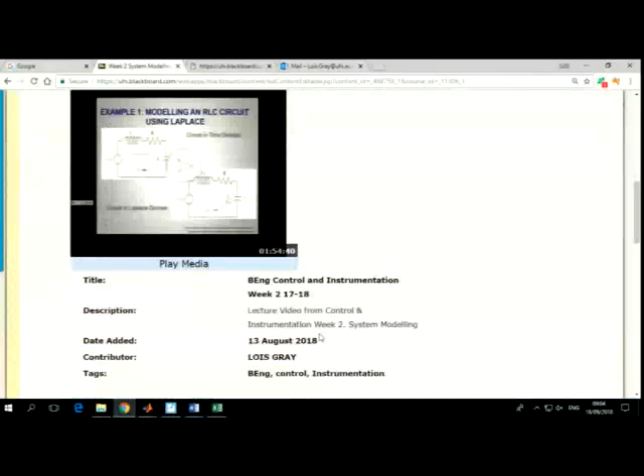So your notes are in this control folder still, so we're still looking at control for a few more weeks yet. We did week 1, so this is the week 2 stuff in here. I do have a PowerPoint which covers some of the more complex aspects, but I'm going to just do the easier models with you on the board first, I think. So as usual, there's PowerPoint, notes, lecture video - this is last year's one, but I'll put up this year's one as soon as it's ready. Some additional maths you just have a wee look at, and Laplace transforms as well.

Yeah, I'm not very sure what that is. I think someone else might have put that up, so same with those - I'm not sure how good those are. That other stuff you don't see.

Okay, so we'll just go with the model straight away if everybody's happy with this. So we're modelling mass spring dampers. I was going to say we're going to look at second order systems today. The slides go into first order systems as well, so we will cover them, but I wanted to concentrate on second order systems because your coursework is going to be a second order system. Right, can you remember what the difference between first order and second order systems was from last week?

No, too much to remember from one week to the next.

First order systems only have one energy storage element, second order systems have two. That's the difference. So a first order system might be something like an RC circuit or an RL circuit. A second order system would be a resistor, inductor, capacitor circuit, or a mass spring damper would be the mechanical equivalent.

So we will look at first order systems and their response, and that's also relevant to your coursework, but I wanted to do the second order ones first anyway. So.

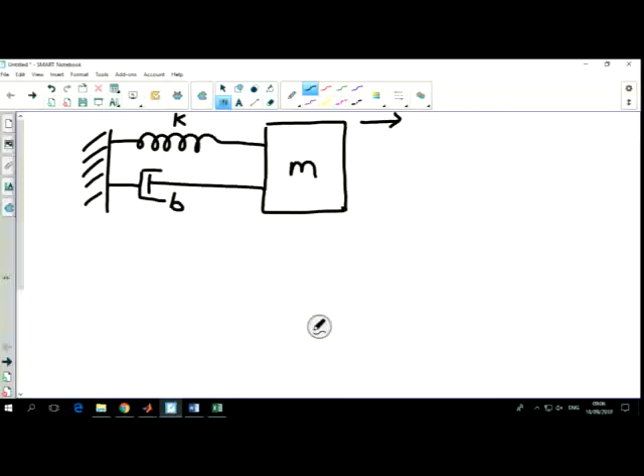We're going to try and move the mass in this direction by a distance x by pulling it with a force F. So this is your basic, most simple mass spring damper system really - there's not really anything more simple. It's a second order system because the mass stores energy and the spring stores energy, the damper dissipates energy.

Have you got any ideas what sort of applications that might apply to, like real systems?

I see the wagon in a train - both of the, I don't know how it's called - the wagons, the bumpers, like, not the wagons, the bumpers when they bump into each other. Yeah, exactly, yeah, exactly, yeah.

Spot on, that's true. There's a more common one I suppose, that most people who have cars - suspension in your car, yeah, like your car suspension, your shock absorbers, or something quite similar. We talked last week about the different kinds of inputs you could have, and if you think about a car, if it falls into a pothole, like if your wheel falls into a pothole, that's like a step change - a very sudden change from one height to another. Whereas going around a corner would be more like a ramp change because that's a constant force - well, pretty constant once you're actually in the corner, and that's applied as you go around.

So you can see why it's important to know how something's going to respond to different types of inputs.

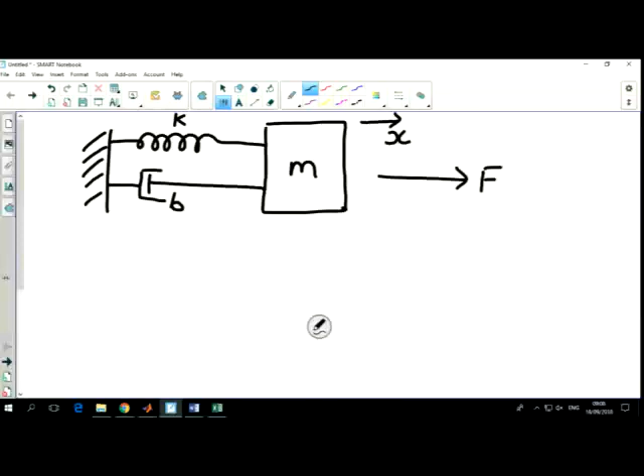The way we work these out - the people who did systems analysis last year will know a bit about this - is we obtain the differential equation for the system, generally in the time domain, by thinking about the first principles of each of the individual objects on the diagram. Later on we will do the Laplace transforms to get it into the Laplace domain, but now we'll start with just the differential equation, so we want to know all the sort of first principles that apply to these different objects.

We've got Hooke's law for the spring, which I think is that the force exerted by a spring is equal to the spring constant times the distance the spring moves.

Why have I got brackets T? Time - so these are functions of time, these vary with time, that's why I've got brackets T there. I don't always put the brackets T, sometimes I miss those off because they start to make the equations very long, but hopefully you will remember which things are varying with time and which things are constants. So K here is a constant - it's determined by the type of spring, what material it's made of, how strong it is, how many coils it has, things like that, so it's a constant related to that particular spring. X is a variable and F is a variable.

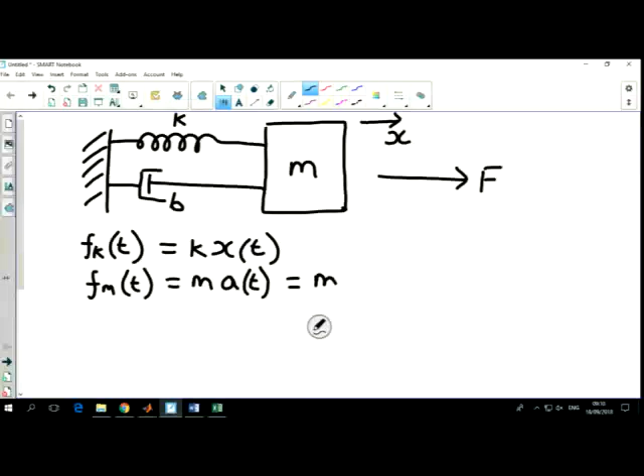Then we've got Newton's second law - I never remember which one's which, but we've got that the force exerted by the mass... anyone want to tell me what that is? Mass times acceleration? Yeah, good, somebody's awake. Mass times acceleration, which of course is a function of t, but mass times acceleration can be written as mass times rate of change of velocity.

That's meant to be a v, by the way, I'm not very good at drawing small v's. Which if we... oh, did that wrong.

So that's the slope of the velocity curve, that's the slope of the distance curve. Does that make sense? But anyway, you just have to believe me that that's equivalent to mass times acceleration. Acceleration is the rate of change of velocity, velocity is the rate of change of distance. So those are the equations that relate to that.

The reason I've done it that way is because when we're modelling this, what we might want to do is apply a force, either a step change or a ramp or an impulse or something different, and see how far the mass actually moves and how it moves. Whether it just moves and stops, whether it moves and bounces around a bit, like you might think, yeah, that's quite relevant to a car suspension or a bus suspension. We don't really want it to bounce about.

We want it just to move and stay solid. So a sports car, is it going to have less bounce than a bus, for instance? Yeah, so that's what we're trying to do here. And then we've got the final one, which is the damper, which is that the force exerted by a damper is equal to the damping coefficient times the velocity that the damper is moving at.

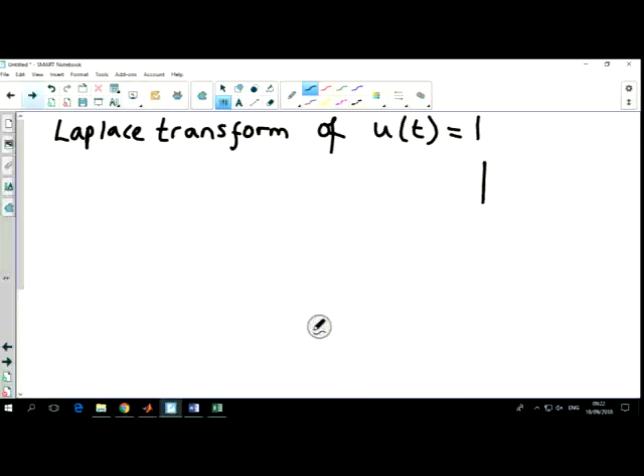In the real world, if we look at time versus amplitude, that particular function, u of t, is just going to look like that. This is the u bracket t function. I'll change to u because that's the standard way they represent steps. For some reason they always call it a function of u over time.

This one's quite easy, and I think most people would even be able to manage this. So we're going from 0 to infinity, and we're going for f of t times e to the minus st dt. In this case, it's going to be from 0 to infinity. Ft and ut are interchangeable, so that's 1 times e to the minus st dt.

Okay, so you guys write down the answer to that for me. You don't need to work it out over the limits, just get the basic integration for me to start with.

Working hard for a Tuesday morning, it's good. Some people are working hard, Robert's flying through it.

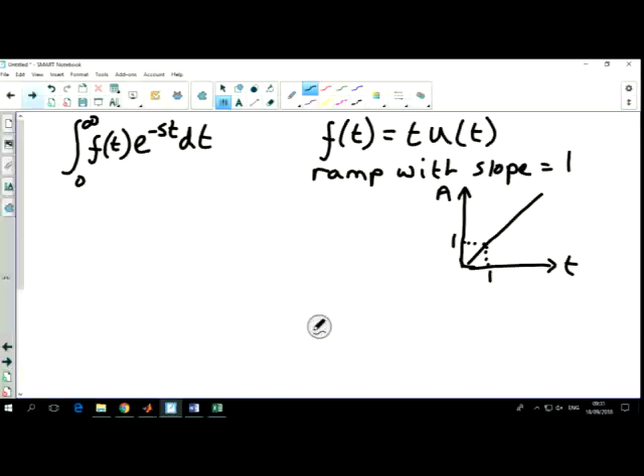Okay, so in that case, u(t) equals 1, and the ramp is just represented by t. So we can put that into our equation over here: t times e to the minus st, dt. Now this one's quite difficult, and I wouldn't expect you to have to do this in the exam, but I just wanted to show you how difficult it is and why the tables are quite useful.

Okay, so does anybody remember doing - what's it called - integration by parts? Is that what it's called? I'm not even sure, but I think it is. Did any of you do Maths 3 last year? Yeah, you would have done integration by parts in that, I think. For sure, it was quite hard, yeah.

The way it works is you can't really integrate that very easily unless you split it up. So you split it into 2 bits, where there's a standard equation for integration by parts: if you've got 2 functions like that, you can split it up into u, v. It's been a while since I've done this, I'm copying off my notes, but there's u, v, and du. The trickiest bit, I think, is picking which bit's which.

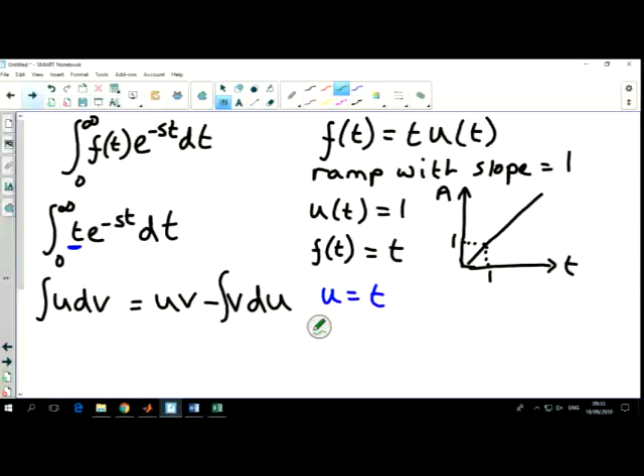So for this one, I've kind of done it in advance. In this case, we're going to say that u is t, so that's that bit - let me do it in a different colour. So that's that part, yeah? And the dv bit is e to the minus st.

So I do feel a bit sorry for the people taking this as their first unit. At least you guys have done some stuff last year, but it's really tricky as well for us - the dv bit, e to the minus st. That's why I don't like people doing this first, because it's quite tough.

Okay, then we want to just find the du. Obviously, we're going to need du, we're going to need v, and we're going to need u and v separately. So we have u - yeah, we said u equals t. We have dv - oh sorry, no, we don't have dv, we don't have v, we don't have du, and we don't have anything else. So we can get the other bits by just doing our derivatives.

So if you do the derivative du, what do you get for that equation there? T squared? Robert? 1? No, just dt - derivative of t. Yeah? You just saw it there. You do the derivative on one side, you have to do the derivative on the other side, just like any algebra. If you add something to one side, you have to add it to the other side; integrate one side, integrate the other side. So that's quite easy.

And to get this one, to find the v part, what we'll have to do is integrate dv, that gives us v, yeah? Integrals are the opposite of derivatives. So what we'd have to do is integrate e to the minus st, which you've already done quite a lot.

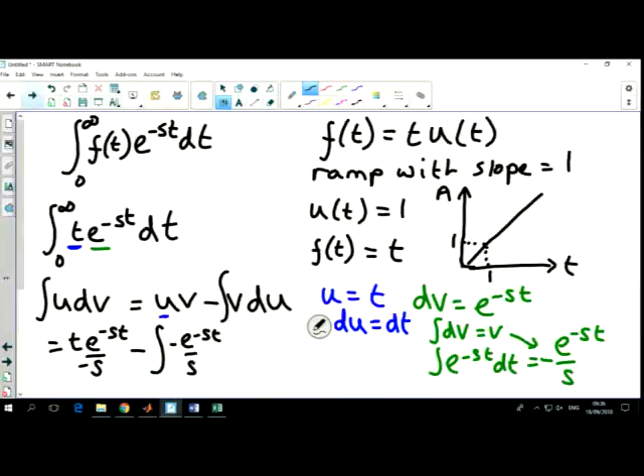What's V? Well, we just did that, didn't we? V is negative e to the minus st over s. So yeah, just move the negative sign up again. And du is dt, yeah?

So sadly we've got still a wee bit more integration to do, but we're getting there. Okay, this bit's finalised, we don't need to do anything with that bit. There's nothing else to do there, so we can rewrite that bit.

You can see where your maths comes in now, right? I think this is the unit that uses the most maths. I don't know if mechanical people would agree with that as well, but in my opinion it probably is.

Right, so now if we integrate that, we're going to get the top bit doesn't change, and the bottom bit we've got s, so we get s squared, only there's also a negative sign again. So it's actually negative times negative, or negative divided by negative, which gives you a positive.

And sorry, I forgot to put the limits on here. We should have limits, 0 to infinity. Because the whole thing was to do with our original equation up here, where we were integrating 0 to infinity, so we do have limits all the way through.

So we're almost there now. So if we rewrite that. So you can see actually integrating e to the minus something is actually quite easy. It's just the minus times t part always multiplies on the bottom, it always becomes a denominator. It's actually quite straightforward. Right.

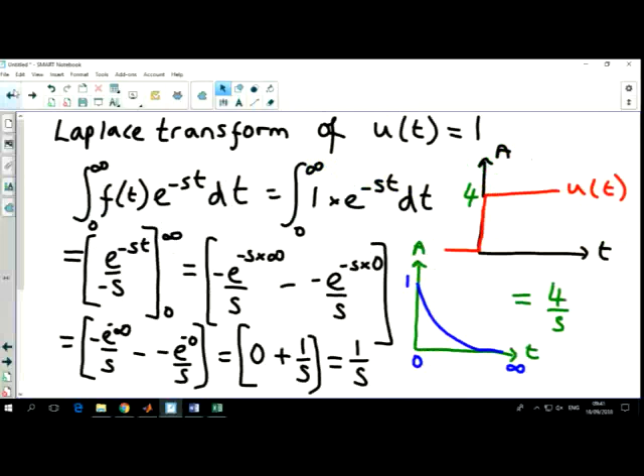If we go right back to our original equation, if you remember, the whole point of doing these Laplace transforms was to simplify that.

Now, there's a very straightforward Laplace table. I haven't got it to hand, but if you've got a function in the time domain and you want to convert that to a function in the S domain, S being the Laplace variable, you can get this table of transforms from most books. I'm pretty sure it's in our book here.

So you can have things like the function of time does actually just transform to a function of S. We write the functions in the S domain with capital letters, so we can differentiate them from the functions in the time domain. Okay, so that's the first thing.

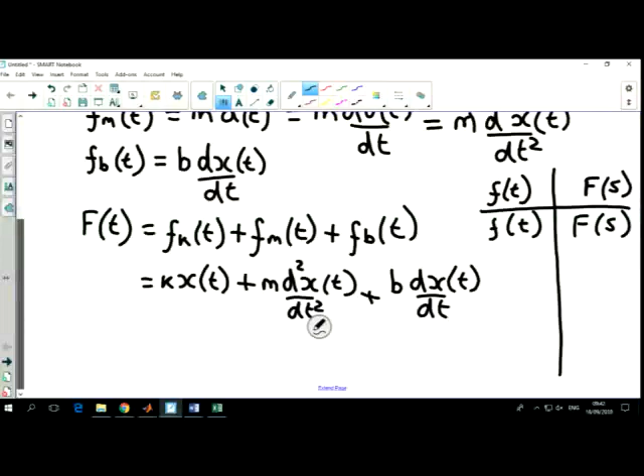Derivative, like dx(t) by dt, let's call it df(t) by dt. That transforms to S times f(s). Now, if you want to be really clever, you can go away and try and actually do that with the Laplace equation, but I wouldn't suggest you do unless you really like maths.

The second order function transforms to s squared times f of s. So hopefully you can see a pattern there. A third order function would be s cubed times the function in the S domain. Fourth order different - you're never going to do fourth order derivatives or differentials.

And then the only other one, I suppose, that's of some importance is the integral. That transforms to f of s over s. So pretty much that's the only one you're ever going to need for your system equations.

Transformation of system equations is this little columns here. Right, so I'm going to set you a little challenge now.

Going by this table, instead of a function of t, you've got f of t, you've got x of t. But other than that, it's the same. Try and transform this for me into the S domain. This is a constant, it won't change. That's a constant, it doesn't change. That's a constant, it doesn't change. So you just need to concentrate on the x brackets t parts. Okay? I'll see if anybody can do this.

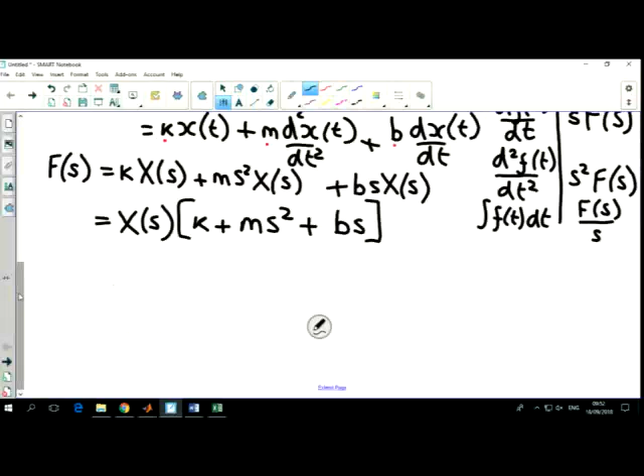That would give us, let's write this out so we've got more space. There's a few different ways of doing the next step, so it's up to you how you do it, but one way of doing it is to divide both sides by that big term there.

And in fact, I guess if you knew what your force was, you weren't going to do any modelling, you just wanted to see how x changed with a specific force, you could probably just use that equation as it stands, like that. But we actually want to have x over f. So if we divide both sides by f now, we get f of s divided by f of s, which gives us 1.

Oh, that should be an s. Sorry, that was a mistake. Es equals...

And that's the thing you can put into Simulink. I'll show you that to give you a break from the maths for a few minutes before we go into the electrical system.

So this is brilliant. We now have a model of that mass spring damper, and we can apply any sort of force to it and see what happens in the virtual simulation world. We can change our mass, spring, and damping coefficients and see how that affects how the mass moves. So it's really good.

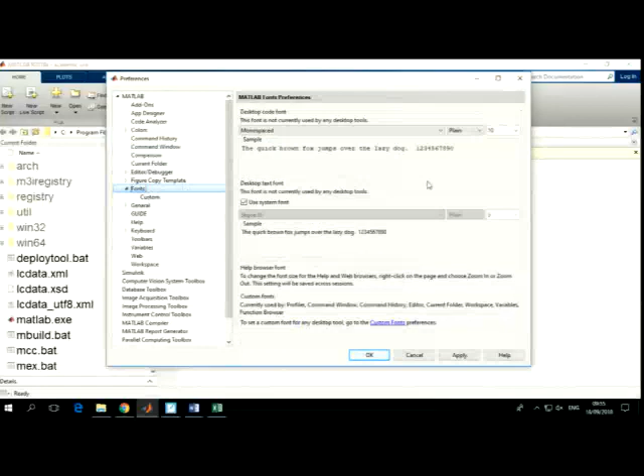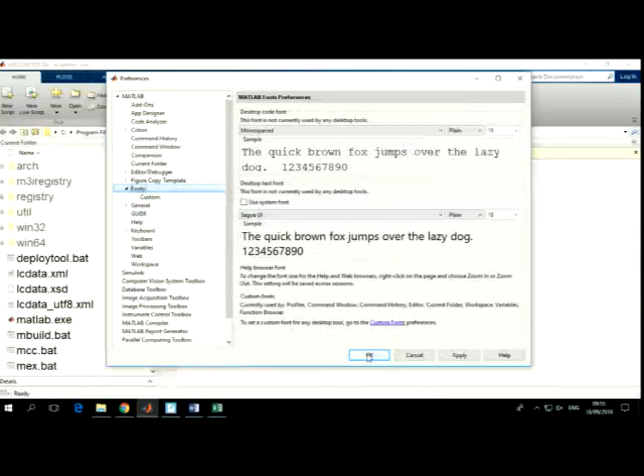Didn't get any bigger, did it? We know what's the next step. Sorry, right, okay, I don't know why that's so small.

But anyway, you can search for them in the search term here. You can search for transfer function. I know it's in this continuous block here. It's this one here, 1 over s plus 1.

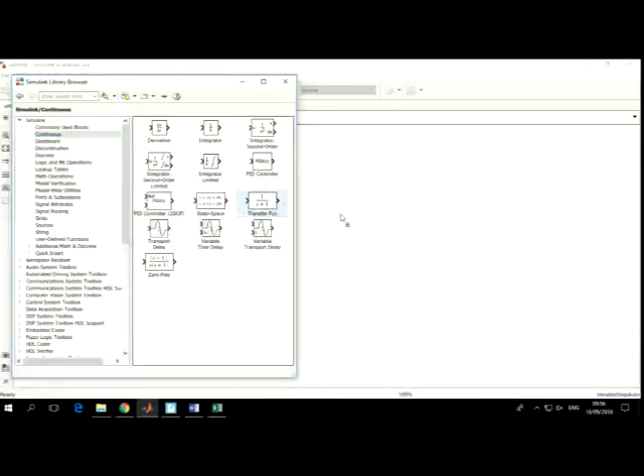I don't know how clear that is, it's probably not very clear to you, but we'll see it when I move it. So you just click and drag it, left click and drag it to take it onto your screen here. I think most people have used Simulink recently.

Then, if you're ever presenting these to me, I need to be able to see the equations inside the boxes. So make sure your boxes are big enough. If they just say k, that doesn't mean anything to me. I have to actually be able to see the equations.

So we want to edit this equation. So we had, on the top line we had 1, so that's fine. On the bottom line, I don't know if anyone can remember what we had. We had...

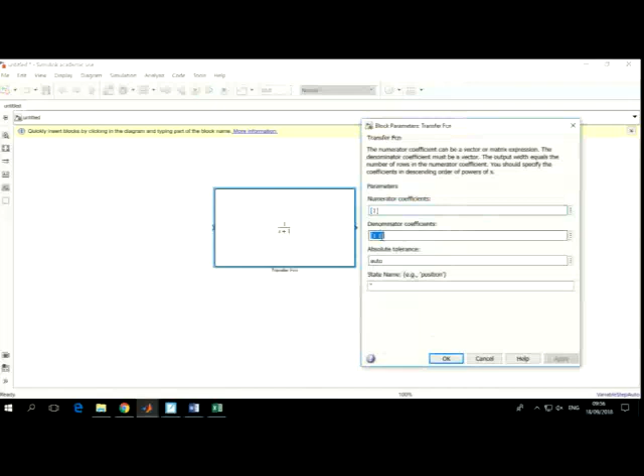Switching back to the notepad, I can't actually remember what it was. K, ms squared, bs. Oh yeah, now, when you're modelling these in MATLAB, you've got to rearrange them so that the s squared term is on the furthest side, or the highest power of s is on the left, yeah? I don't know if you remember that from last year, but...

So I would need to rewrite that as ms squared plus bs plus k. Later, probably next week, that's a very bad k, but hopefully you know what that was. Next week I'm going to show you how to relate that to a standard second order system.

So we've got m, b and k to put into our brackets. Can't make this any bigger, not really. We've got m there, b and k.

Sorry it's so small. The way it works is MATLAB will put the s terms in, so it knows it's doing a model in the Laplace domain, and it also puts plus signs in as well. So you only type in the multipliers of the s terms, yeah? So the multipliers in this case are m, b, and k, with spaces between them.

Have you done this before? No? Okay, so this is new to some people. I think some folk have definitely done it before. But... okay, then hopefully... I can make that font bigger.

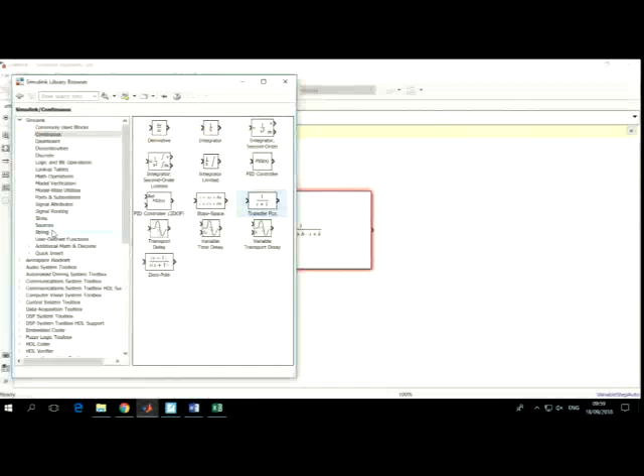We can simulate that system. There's a couple of different ways of simulating it. You can add in, let's get the library - we'll do something really simple because I don't want to spend too much time on this. You can add in a source, so let's say a step here. Just connect it up by left clicking, and then we can have a sink. Where's my library? Just put a scope on. There's better ways of simulating it, but we'll just go with this just now.

Okay, and I could just click run. Would that work? Would that simulate? No. Why not? Because you need to go to the analysis tool - no, it's because there's no values. I haven't put any values in for the mass, the spring constant, or the damping coefficient.

So let's type some values in. Normally you would do that on the command window here. I think last week I told you you should always make scripts, but if you're just putting values in, it's fine to do them just in the command window. You don't need a script just to add a value.

So I don't know, let's go for 2 kilos. I don't know if these are even realistic numbers, but - was the last one B, wasn't it? Actually, probably not very realistic numbers, but they'll do just now.

So now we can simulate that. And you're quite right, somebody said, oh, you need to use the analysis tool. The analysis tool is a better way of simulating it, and I'll show you that probably another day. That uses different input and output, but it'll give you better results, especially if you're looking for things like frequency analysis, like bode plots. But for the moment, this will do.

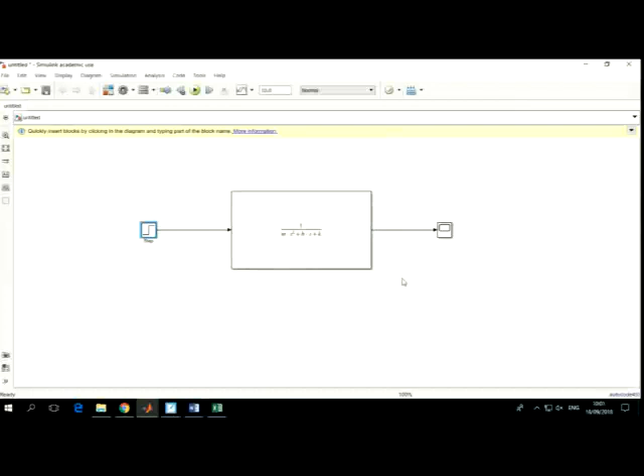So what we put in here was a step. It had a delay of 1, so there was a lag time of 1 before the step was applied. It started at 0 and went up to an amplitude of 1, so it's a unity step. We can check on the scope what's actually happened. Hopefully - is that happening?

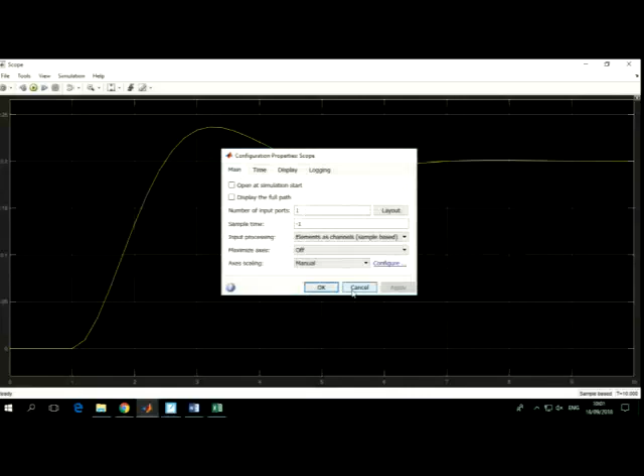Yeah, okay, and here we have a reasonably typical - let's change the background. I can't remember how you change the background on these. You're on the right bit, I think. It's alright like that, can you see that? No, I think you're on the right bit. Yeah, I thought it was, but I couldn't figure out - style, maybe. And then I can change that to a different colour, and I should be able to change the figure colour to white. No, that didn't work, did it? Axis colours white - that's better. There you go, you can see that better, I think, yeah?

So this is a fairly typical response for a second-order system. You can see that it reaches a final value. Remember last week I said you had a transient section of the response and a steady-state section of the response. So this part here is the steady-state section, it's reaching a final value. I can tell you it's only reaching 0.2, and we've got an amplitude of 1 in, so it's got quite a lot of loss, it's got a big steady-state error. We would expect it to reach 1.

It's got a bit of overshoot, so the mass will actually move and then settle and then move again. It'll move backwards and forwards before it finally settles. So it'll move in the direction it's being pulled, and then it'll move back, and then it'll settle. It'll stop moving, yeah? Remember, we're not applying the force all the time - we're just applying a force and then taking it away, or a sudden change in force and then keeping it constant, rather. That's what I meant there. Okay, so you know you can measure certain things off this.

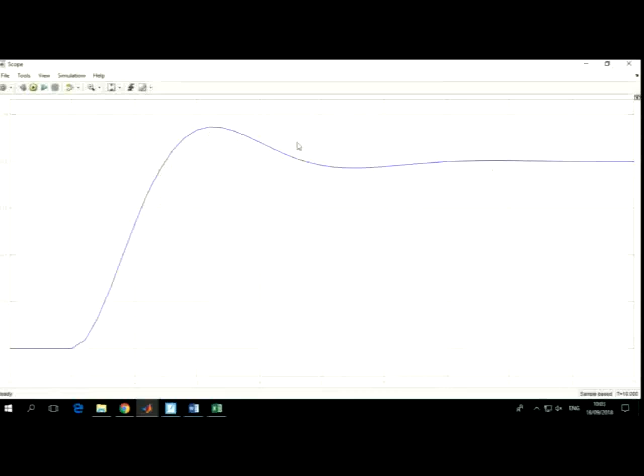You can measure your rise time, overshoot, and settling time, and that would really define how that mass was going to perform in the system. So if it was a shock absorber, that's not a bad curve - it's not going to give you a lot of bounce. I'd say that's more like a sports car than a bus. The bus is probably going to wobble and then settle down. Does that make sense?

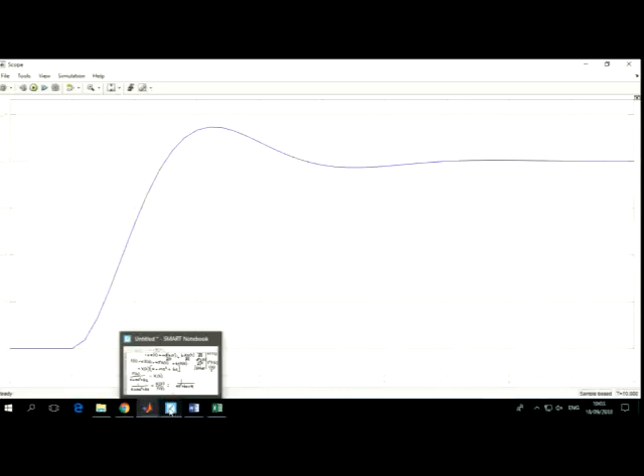Okay, happy with that? So that's how you model it. Now I wanted to show you the equivalent electrical one. We'll do it a bit quicker and not with quite as much maths. So, let's get a new page.

This is the last bit - well, it's not really the last bit because I want to go through the slides as well, but this is the last bit of complicated maths, I would say. Okay, so...

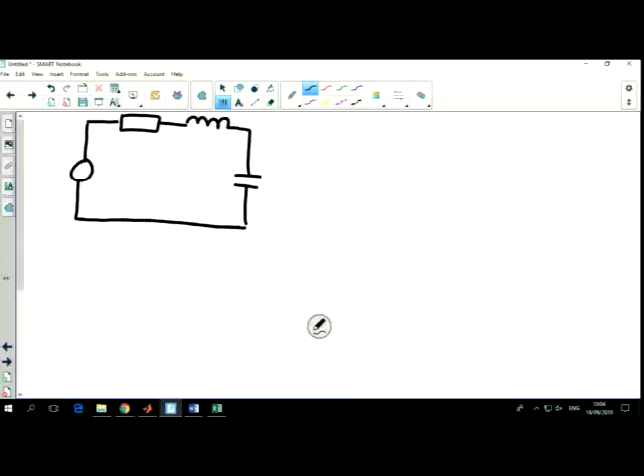Again, we'll do a second-order system. This time we're going to have an inductor and a capacitor in the system. We'll have a voltage here - call it the source voltage. We'll have a volts drop across the resistor, a volts drop across the inductor, and a volts drop across the capacitor.

Okay, and then from Kirchhoff's laws, we know that the sum of potential differences equals the sum of EMFs, yeah? That's from Kirchhoff's voltage law.

And then from our first principles, we can relate the voltages to the current flowing through the circuit, and then we could find what happens with the current if we apply a change in voltage. Okay, so it's a series circuit, so it's the same current that flows right around the whole circuit. Let's call it I - current, because I is normally what we use for current.

Okay, so this side of the equation doesn't change. We can use Ohm's law for VR, for that one. Let's give these some values - so that's R, that's L, and that's C. They could be numbers, but we want to do a model without numbers so that we can change values. So we're going to use variables or constants as letters instead of numbers.

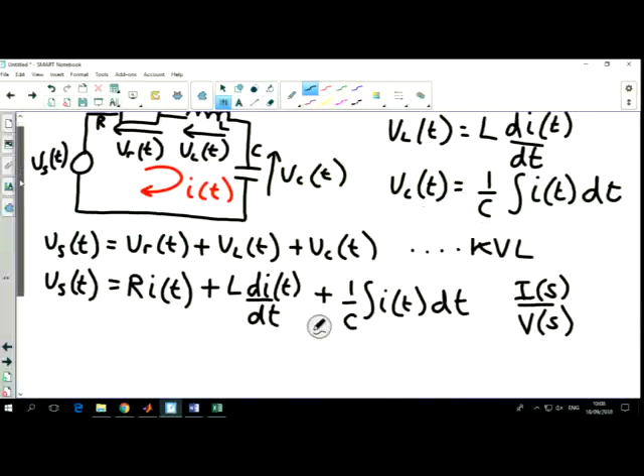Okay? Right, so we want to do our Laplace transforms. I'll rewrite the table here for you. So we had f(t) becomes F(s), df(t) by dt becomes s times F(s). The only other one you need probably is the integral of f(t) dt becomes F(s) over s.

Right, so I want you to do the transform of that equation for me. Okay? Check it. Talk to me.

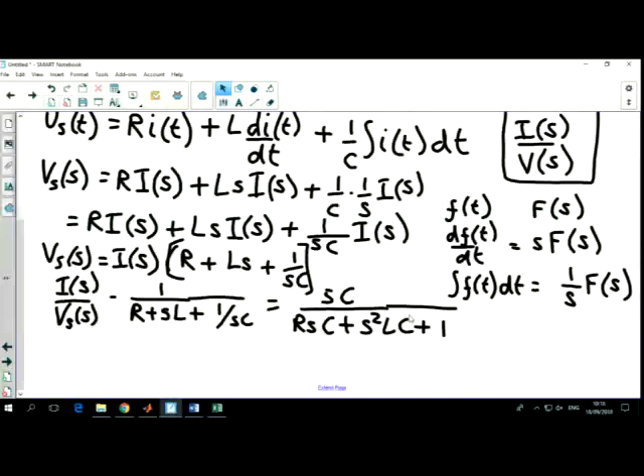Okay. I'm going to put the PowerPoint on now, I think. I'll skip through quite a lot of the slides because we've done quite a lot with the board. Any questions about what we've done so far? I think Harry's still writing stuff, so... I'm okay, that's fine now. You sure? Yeah, done now.

Okay. So, you're not going to really like the maths in this, but you're not going to have to do anything as complicated as this in the exam, so I won't worry too much about it. But I just want to show you how more difficult it gets quite quickly. You don't need to add a lot of elements for it to get pretty tough.

Okay, so we'll just click through this. Done that, that's our table of Laplace transforms - you'll find that in the book. So this is quite easy. This is the time domain, this is the S domain, and you just transfer them.

Don't worry about any of these F0 minus things. They're not really relevant for you just now. I'm only really interested in this bit here.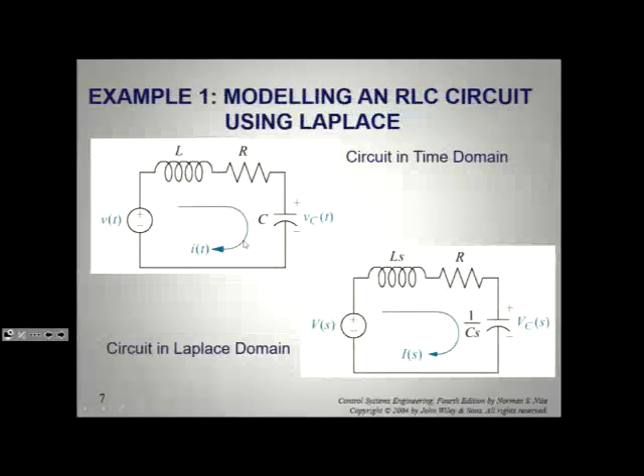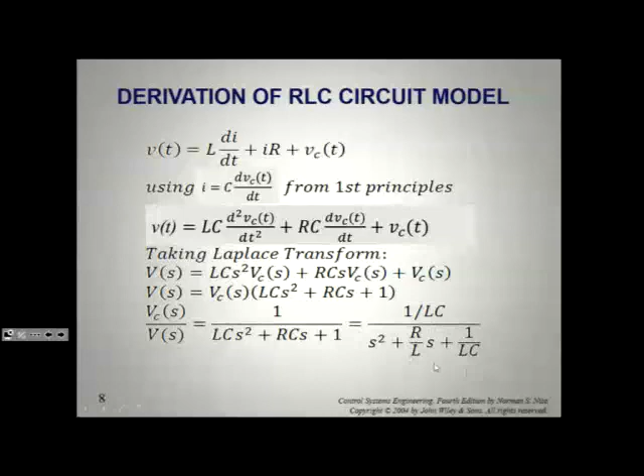That's our circuit in Laplace domain. We've done that, skip through that. You should see this is the same equation that we actually came up with, I think. It's been rearranged a wee bit more, but it's the same idea.

Okay, so now this is a more complicated one. This is two closed circuits together. I don't know what that might represent, maybe a couple of lighting circuits or something like that. So we use our mesh analysis to get equations for both the loops.

In fact, if I switch - yeah, so mesh analysis gives us these equations. We did that last week. Remember doing that, where I showed you how to do Kirchhoff's voltage law for each loop and then relate the equations together. We did do it last week. If you can't remember, have a look at the slides or the video.

So that's our... okay, they've done this a slightly different way. I would normally do that in the time domain first and then transform it, but what they've actually done is they've done the transformation of the elements first. So instead of getting a time domain expression, they've transformed the elements to their equivalent in the Laplace domain.

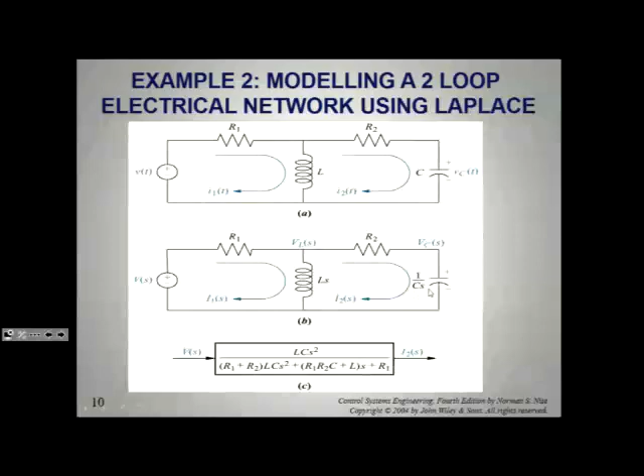So you can see here the inductor has become S times L, and the capacitor has become 1 over S times C. That was what we transformed those to. We did that a minute ago again - it might make it a wee bit easier.

So we end up with our two equations in the Laplace domain, and then it's really a matter of rearranging them so we've got the unknowns all on one side and the knowns all on the other side, which is what's happened here. So these look really complicated, but they're actually not that bad.

And then we can use our matrix algebra to solve this. Again, I showed you that last week. What we'd probably use here is something like Cramer's rule.

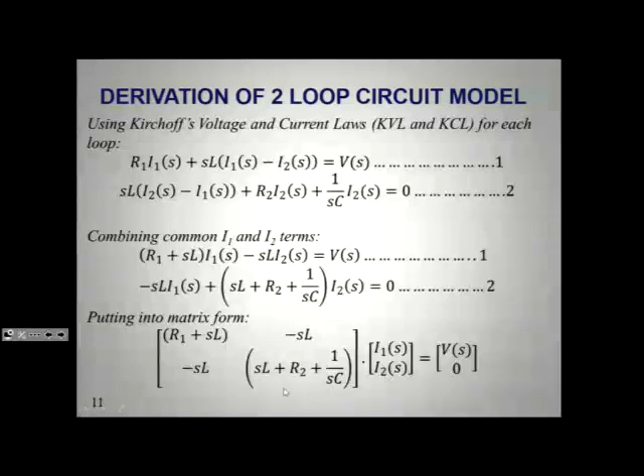So you find the determinant of this matrix, and then to get I1 you would replace this first column with these two, and find the determinant of that. To get I2, replace this column with these two, and find the determinant of that, and eventually get a really complicated equation where, using Cramer's rule, the determinant for I1 divided by the determinant of that, and the determinant for I2 divided by that, gives your system. I'll show you that, but it's pretty complicated.

You can have a look at this in your own time. Go through this and just see if you can follow it at all. So DET stands for determinant, yeah? And it ends up being pretty complicated, but hopefully you can see what that looks like.

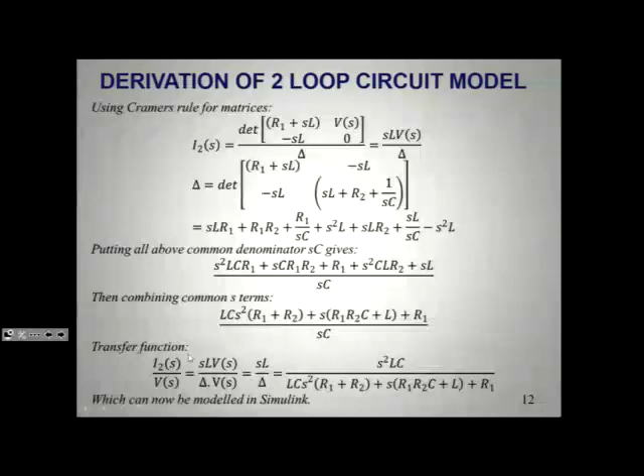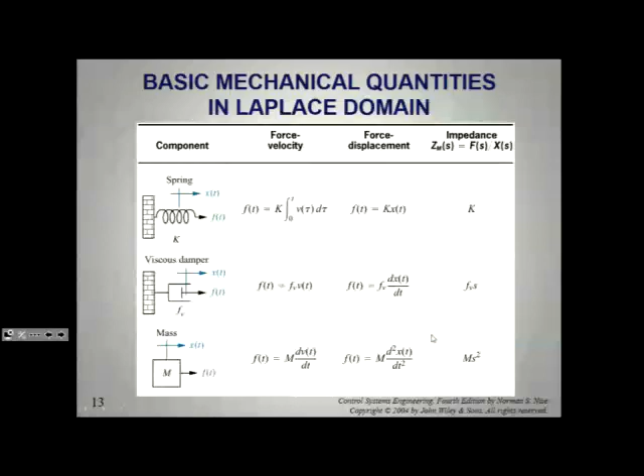And then a wee bit of algebra just to rearrange it to get I2 over V. I don't want to go through that in too much detail. That's our mass spring damper system, equivalent table to the electrical system. We've kind of covered that already - that's the one we did.

So we did that already. That's just showing you the free body diagrams. We'll skip through that. That's the equation that we ended up getting.

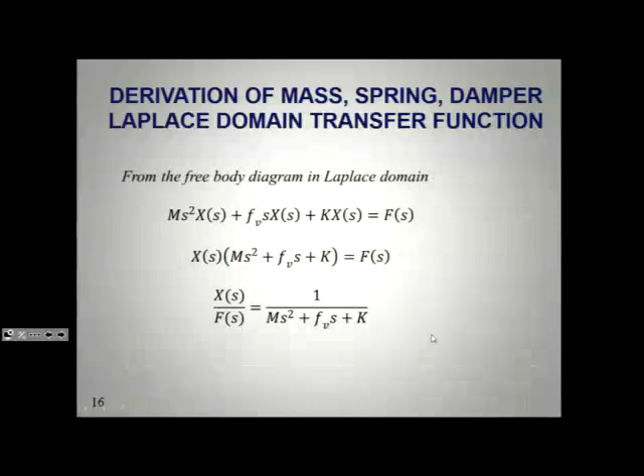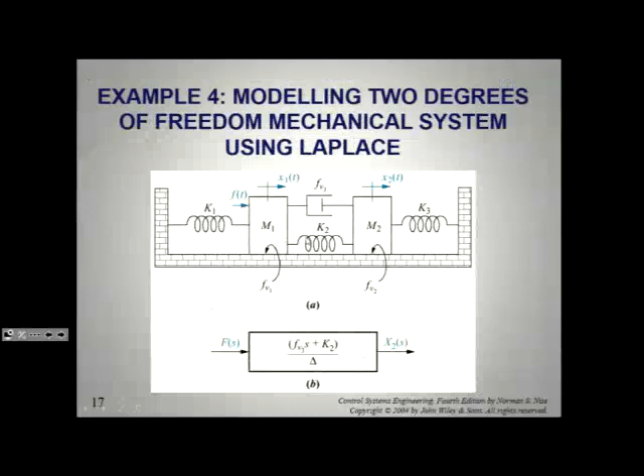Yeah, so again, I think what they've done here is they've converted it straight to the Laplace domain without using the time domain at all. So that's where all these k1 times x, and you see these little s's slipping in here. That's because it's already in the Laplace domain before they started analysing.

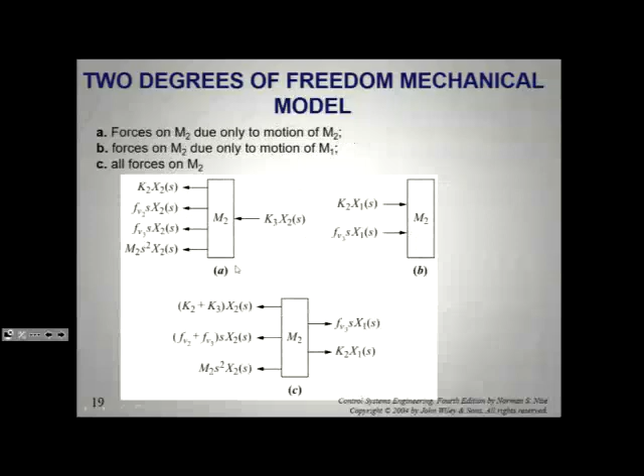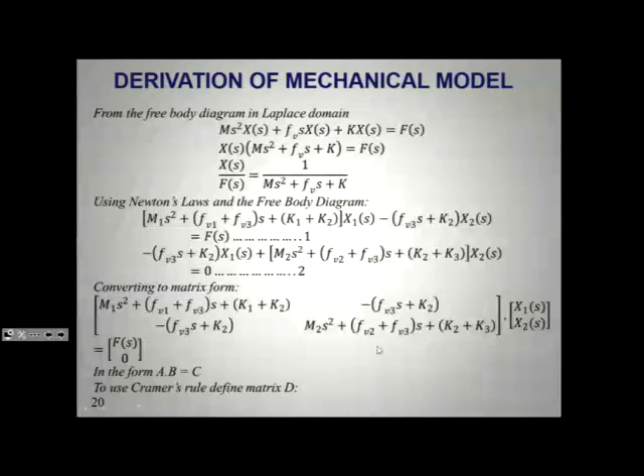Okay, then relating your forces, two simultaneous equations, and the same idea, convert to matrix form and use your Cramer's rule to solve. Yeah. Now it looks really awful, but I guess if you put numbers in, it wouldn't look so bad. So you get something like that. I think we'll just skip through that. People who are really interested in mechanical systems can have a closer look. I don't want to do too much of that.

I just wanted to show you can use this same modelling, mathematical modelling, for other types of systems. So you can also do it for rotational systems. So here you've got your basic equations for rotational systems, and obviously you can analyse a rotational system with that. And you can also do it with electromechanical if you combine mechanical and electrical together. So there's one for a motor later on as well.

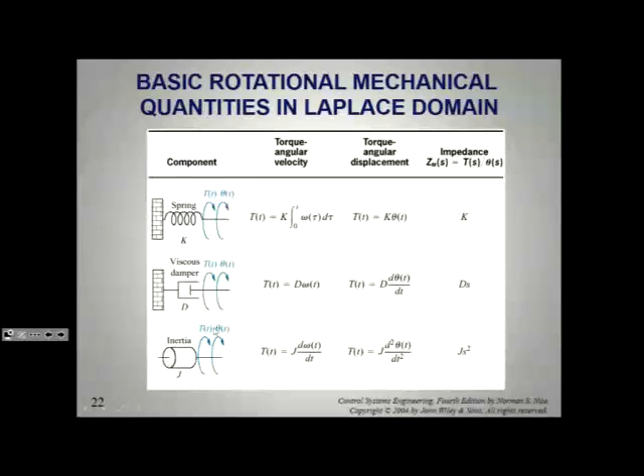So again, same sort of idea. Spring's just a constant, spring constant. That's your damping coefficient. And this time, if you're talking about rotation, you're talking about inertia, J. And that's torque and angle. So different variables, but the same idea.

Again, this tends to get quite difficult because I see the examples in the book don't just have a simple mass spring rotational element in it. They tend to use gears and other rotational elements. So I think it's pretty difficult in the book, this stuff. But,

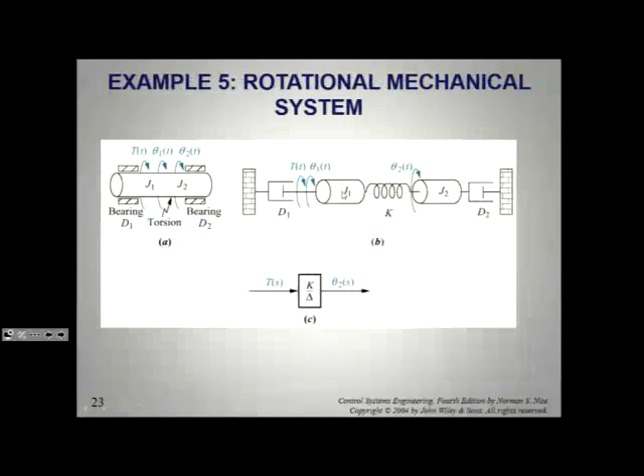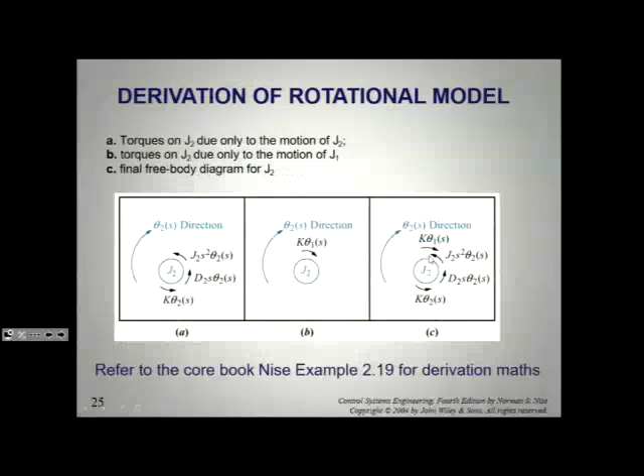so that's analysing this system here. And you've got to do it the same sort of way you did with the two masses. You've got to look at all the forces on J1 and then all the forces on J2, combine them, get your simultaneous equations and solve that. Again, I'm just going to skip through that, I think, because it's a bit too difficult for me. You guys probably aren't going to manage it either. People who are really into mechanical stuff might like it though.

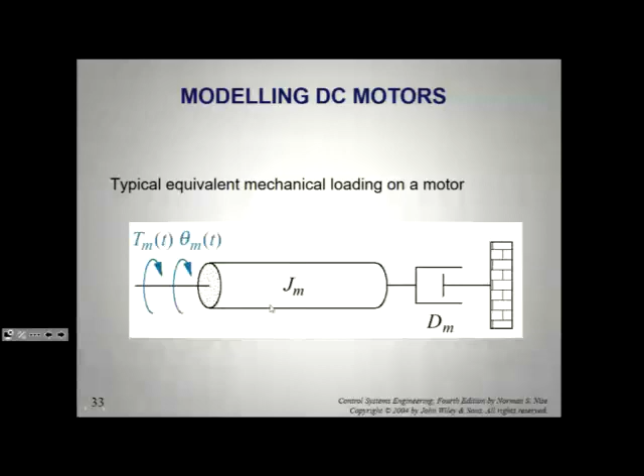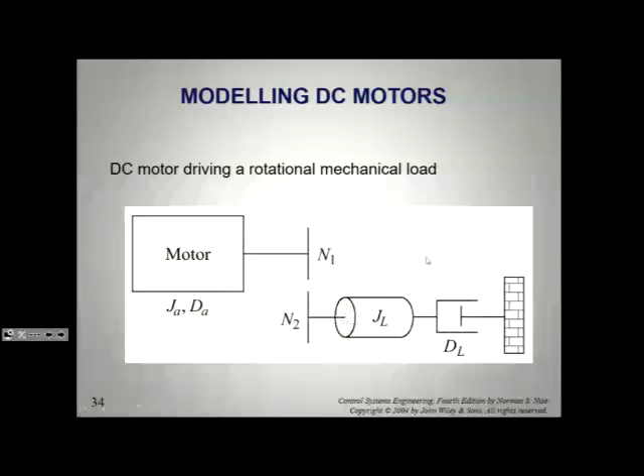It's damper here, and we didn't really do much more than that. That was all I did there, just to show you. So you don't need to worry too much about this unless you're really interested in it, but we're not really going to do that in any detail today.

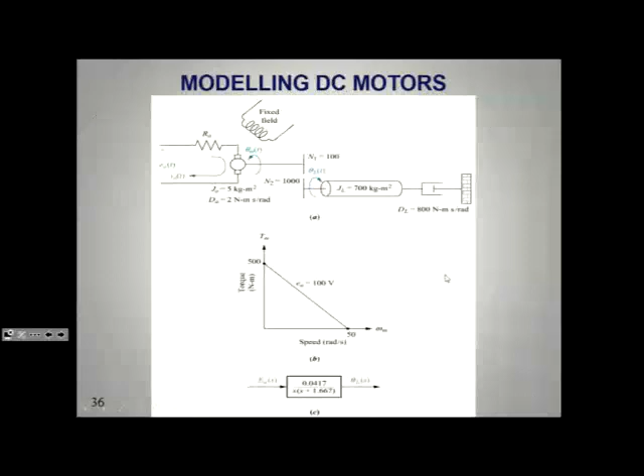The other thing I wanted to say, sometimes you have nonlinear systems. So what sort of things could cause a nonlinear system? Disturbances, possibly, yeah - because they're out with your controls, so we don't really know what effect they're going to have. It could be a linear effect, might be a nonlinear effect.

In the mechanical world, what would cause a nonlinearity in the mechanical world? Okay, so in kind of systems world, I suppose you might get a lag time - for instance, in a flow system where there's a little bit of lag before the flow builds up to what it's meant to be, or a short amount of time where nothing happens.

You could get saturation in the electrical world. I don't know if anybody's ever done anything with amplifiers, but you reach a point where the amplifier can amplify no more, so it doesn't follow a linear function anymore, it just stops.

So that's a nonlinearity. I think with the mechanical world, they normally talk about backlash in gears, so that's where the gears don't mesh straight away - there's a little bit of a delay before one gear will turn and the other one won't, before they mesh and start to rotate together. So again, that's a nonlinearity - it's quite a lot of things.

All the systems we're looking at, we're assuming are linear, but it's not always true. And what you have to do, if you do get a nonlinearity, is restrict the time period or the input that you're looking at to a very small fraction of the total input, and just analyse for that little bit.

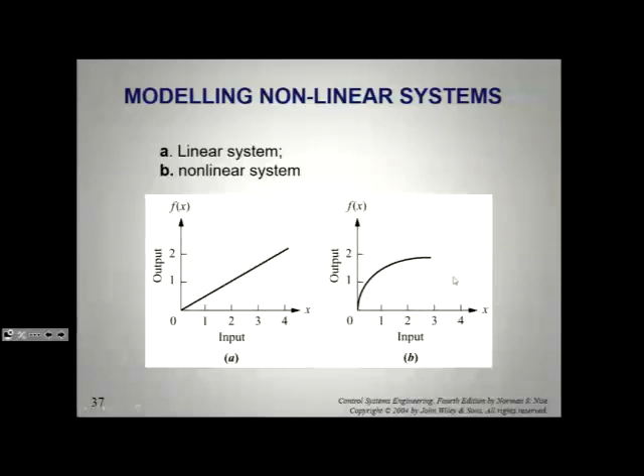There's some ideas of nonlinearities there, and that's what Simulink does. Right, that's the end of the slides - I'm not going to go into any more detail with them because I want to show you the coursework. So, has anybody any questions? It's been quite a long lecture, so I'm probably falling asleep.

Let's have a look at coursework, and you can maybe have a look at getting started on this today. So, it's under assignments. I think I'd already opened it actually down here.

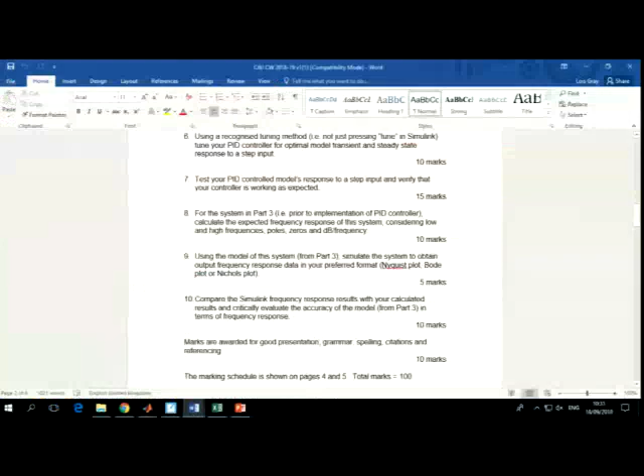So the idea is we're going to be looking at a real system - all right, it's not really a real system, it's the Bytronic rig, but it's near enough a real system. We're going to be measuring some data from it - I've already done this. You can have a look at the video and you'll get the data. If the data's on Blackboard, I'll show you where that is. And then using that data, or using the system, it's up to you - you're going to draw a block diagram and then model each element, or model it as an entire system. You've got a choice.

So, if we look at the data, I've got the data open here.

The first problem with the data is that we applied a step change to the level control. When you look at the video, you'll see some of you used the rig before. There's a bottom tank, a pump, a couple of valves and flow measurement sensors, and then there's a top tank.

With the rig, you can control the flow and the level in the tank. I think you can control the temperature too, but we're not doing anything with that. There are various methods of controlling them — you can vary the voltage to the pump so it pumps faster or slower, or vary the valve opening to restrict or increase the flow rate.

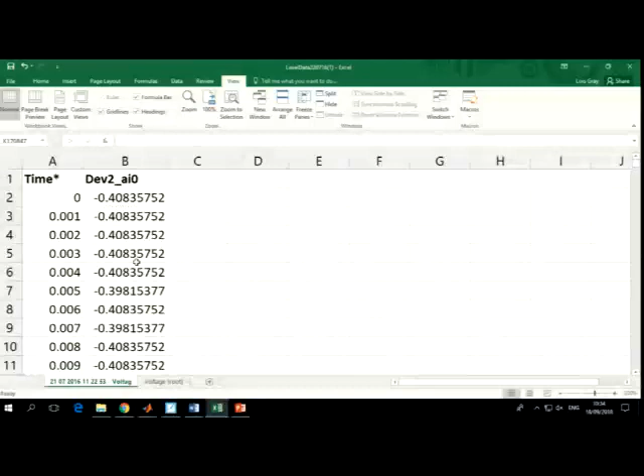I think it might be minus 0.4, I'll check in a minute. So it stayed pretty much at a negative level for a while, which suggests there was a bit of a lag before it started to fill. Then if we scroll down, somewhere around here it starts to fill — so now it's at 0.

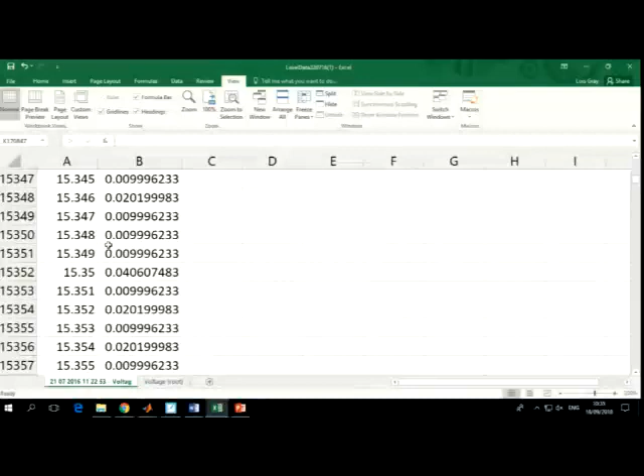That means the water level has come up to the 0 point, and the sensor's reporting that it's at 0, and then it just carries on filling over a period of time until it reaches 80%, or nearly 80% — okay, so it's 76%.

So first of all, looking at that, would there be a steady state error in this system? Yeah, of about 4% — we're expecting 80% and it only went to 76%. So there's a steady state error. It never goes above 76, right up to the end here.

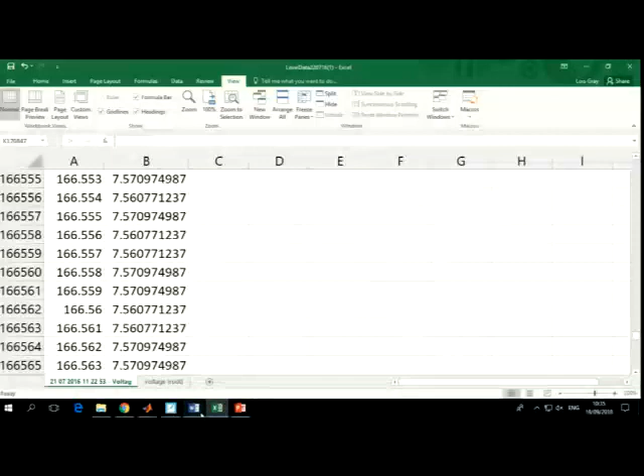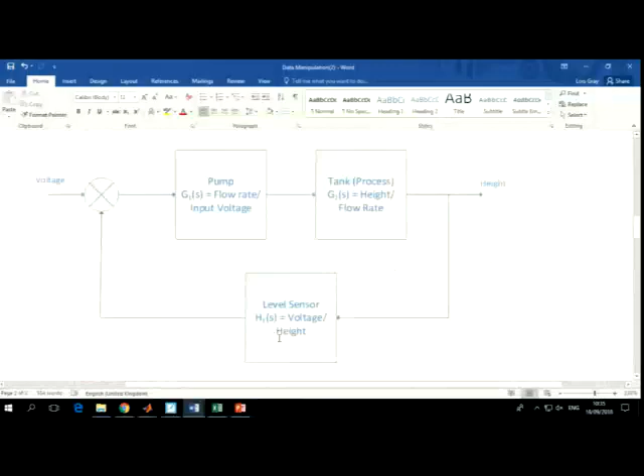Okay, so if I just swap over to... right, so a few different ways of... the first thing to do is get a block diagram.

So you'll need to watch the video and understand what's happening — how the bottom tank, pump, top tank, and level sensor all relate to each other, what's giving you the feedback, what's recording the data. But I think you'll get all that from the video, and we'll have the rig here next week anyway. So the first thing is a block diagram, and then the next thing is to try and get a mathematical representation of the system — there are a few different ways of doing that.

The first one is to use the data. There are too many data measurements, so you'll have to find a way of reducing the number of measurements — maybe take a measurement every second. So from the data that's there, reduce it down by filtering or...

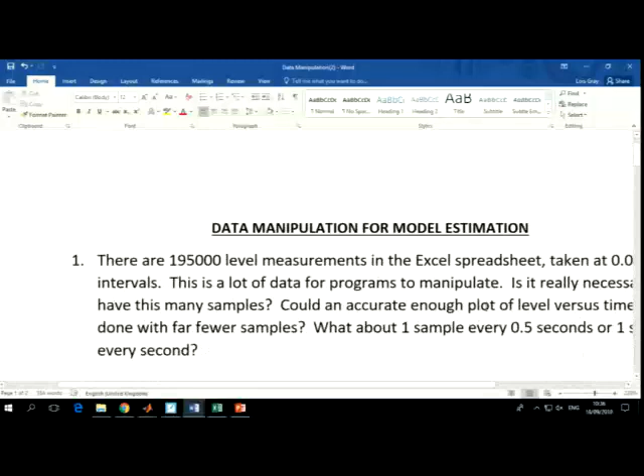I didn't actually do this last year. It was the students who found their own way of doing this.

Using macros or offset functions in Excel, you'll need to do a bit of research into how to reduce the amount of data. One measurement per second is enough. You can do it manually, but it'll take a long time to scroll through all that data and pick out every one second, so try to find an automatic way of doing that.

Then you could plot that data, again using Excel, to get a nice little graph. If I scroll back to here, the sort of graph you might get will be either... Now we've not really covered first and second order functions, but I have touched on them. You might get a graph that does that, or you might get a graph that does that.

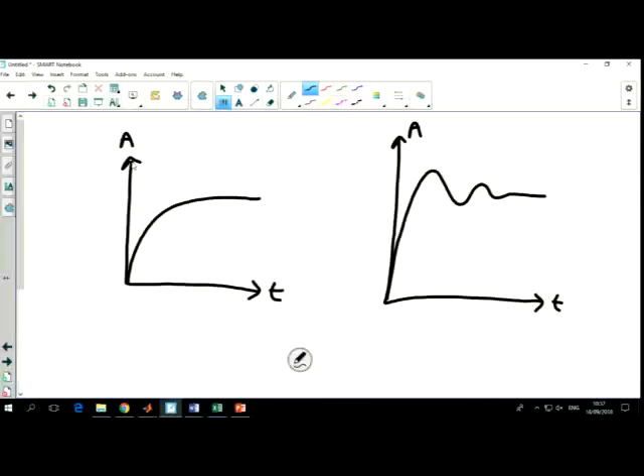So from your graph you might work out whether it's a first order system or a second order system. Which of those do you think is first order and which is second? The first one's first order. Good, so you do remember this stuff. I didn't know if I covered that in enough detail, but that would be a first order system, and this would be a second order system.

Now of course it might be neither. If it's neither, you've got a bit of a problem using the data, but having errors is fine, so long as you justify why you've got them and explain that in your coursework. In fact, having errors is quite good, because it means you've got to think about why you've got these errors and what you can do to make it better.

But say you assume it's a first order system, then you can measure some stuff off the graph. Now I haven't really shown you all this, but you've got things like time constants, which is when it gets to 63.2% of final value. Have I shown you this? No, I think this was for next week. But we'll get there then, we'll give you a start.

Going by next week's lecture, which is probably the point we'll be at by then anyway, you can then use a standard function and put your values in from your measurements, and use that to represent your system. It might not be very accurate.

That's one way. If it's a second order system, obviously there's stuff you can measure there. You can measure rise time, peak time, overshoot, and so on. There's also a standard function for second order based on these values. That's next week's lecture though, so I'm not going to go into too much detail just now.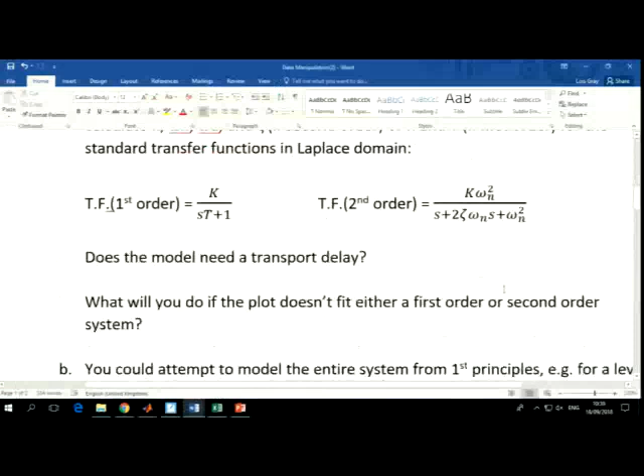But anyway, that's one way, using the data: minimize the data so you don't have so many data points, plot the data, determine what type of function or system it is, and then relate it to a standard system of the same type, getting your values from that. The other way of doing it is, there's your standard values, standard functions here. Next week we'll cover those.

Another way to do it is from first principles. I wouldn't necessarily recommend this. Some students did try it last year. The problem is you need a really good understanding of how each element works, so you need to be able to get the transfer function for a pump, for instance. Now I don't know how easy that is, I've never tried to do that myself.

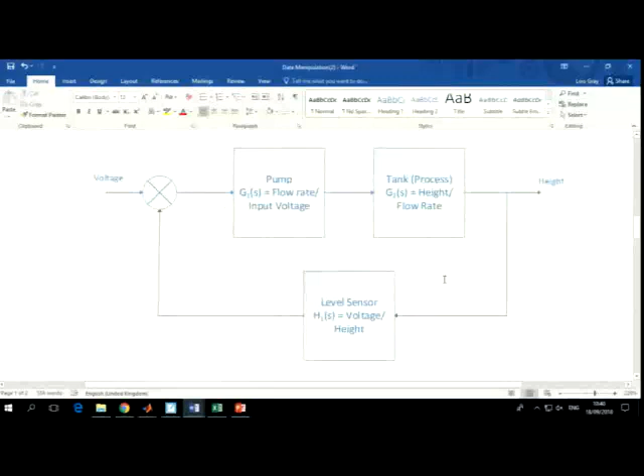But that is another option, and to be honest, if you did this correctly, you'd get a far more accurate model. But it's going to be quite difficult mathematically, because you've got each element modeled separately.

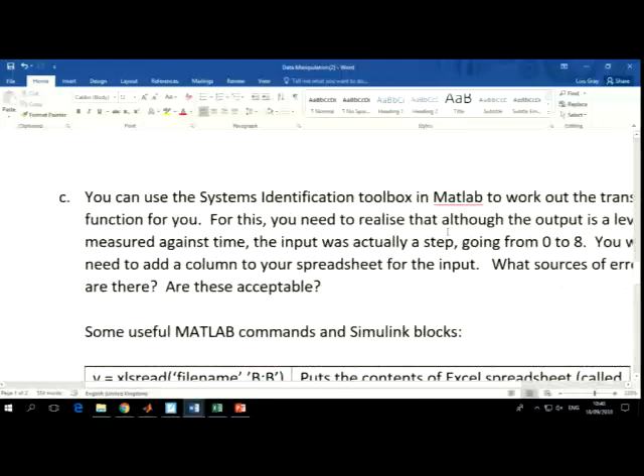So that's another option. The third option is that the version of MATLAB we have is pretty powerful and has a thing called the Systems Identification Toolbox, whereby you can enter Excel data. You'll need to add another column to show your step function, but you can enter input data and output data, and MATLAB will work out a transfer function relating the two elements of data together. It can't deal with the non-linearities though, so I'm not sure how accurate that will be.

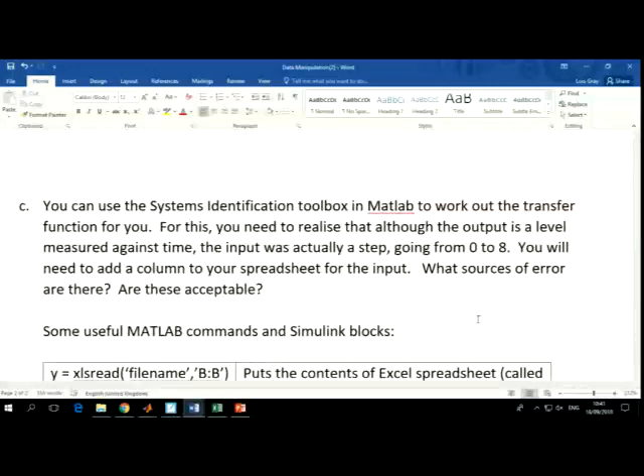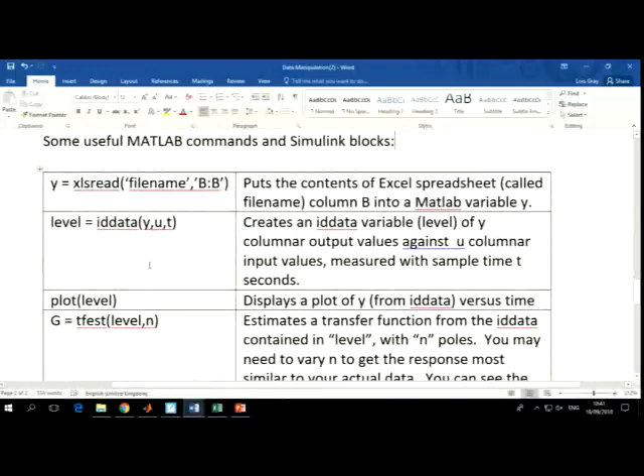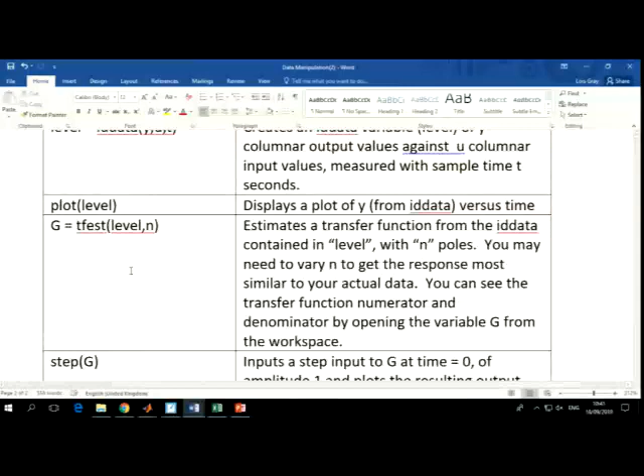There might be some errors in that as well, but I've got some of the commands here if you want to have a go at doing that. You might end up with a more accurate model. So what you do is follow this through, and when you do this part, you'll end up with a transfer function in the S domain with S domain parameters, and you can then use that as your mathematical model instead. So it's letting MATLAB do all the work for you really, which is really clever. But there you go.

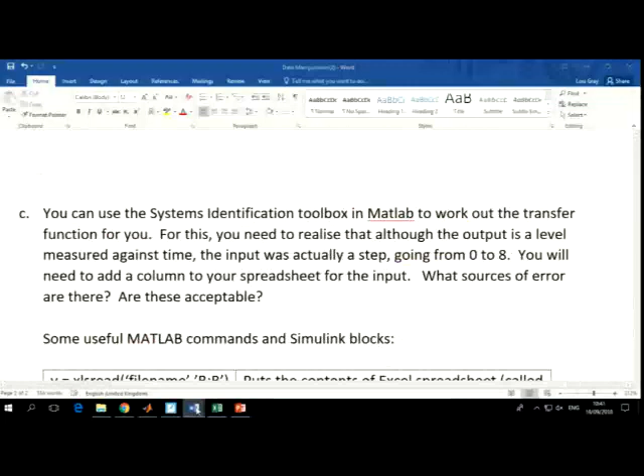Okay, so going back to the coursework, I don't think you'll get much further than that in the next couple of weeks.

Let's do that - modelling it, testing it, of course, to check that it does actually do the same thing as the real system does, that you get the same rise times, the same settling times, the same steady state errors with your model, because there's no point carrying on if you don't.

I've got to say, in most cases you probably won't - there will be some errors. At that point, you need to explain why you think there's errors and justify how you could possibly correct them. You don't necessarily have to correct them. You won't lose marks for not correcting them so long as you explain that you've noticed them and you've got some understanding of why you got them.

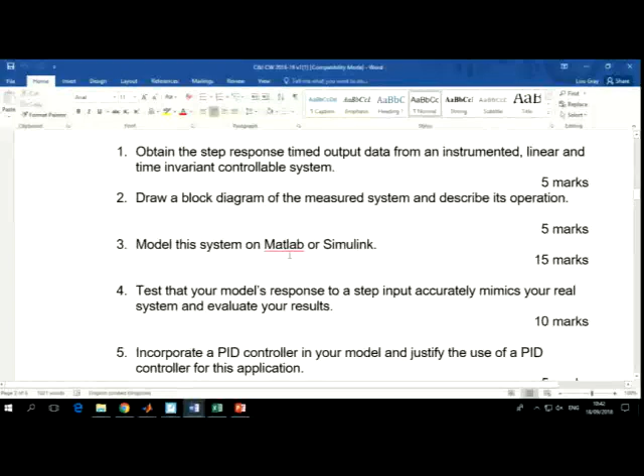And then doing some tests with a step input. And then this next bit I'll maybe explain later, but the idea is that you're going to incorporate a PID controller to get rid of any issues, or to improve the system essentially, so that it fills up faster and doesn't overshoot.

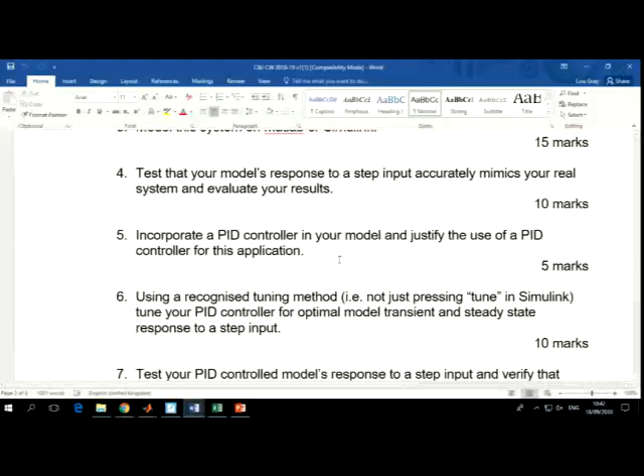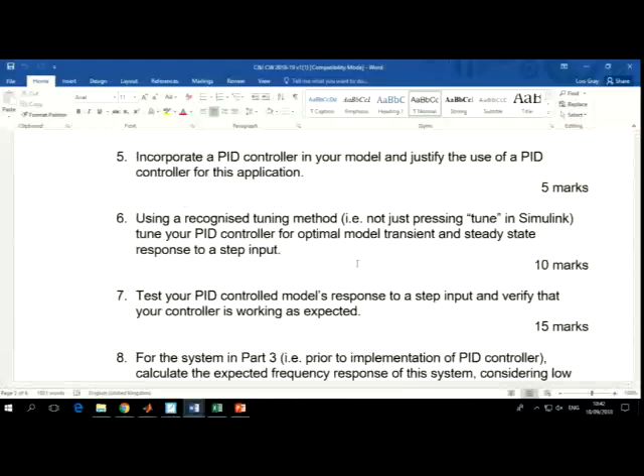With it being just a level control, the improvements are quite minimal because it's obviously got the limited speed at which it can fill anyway. But that's the idea, and if we have time at the end - it's not really part of the coursework - we could try putting in your PID parameters.

PID stands for proportional integral derivative. I think you've done this before. You can try putting them into the real system and we'll see if it does actually improve the speed. The only thing you can really improve is the speed at which it fills, I think - I'm not sure you can really improve much else. Obviously, if it overshoots, you can get rid of that as well, but I'm not sure if it does overshoot or not.

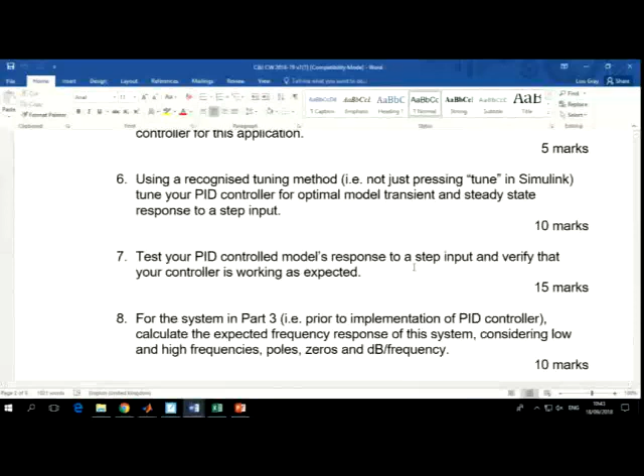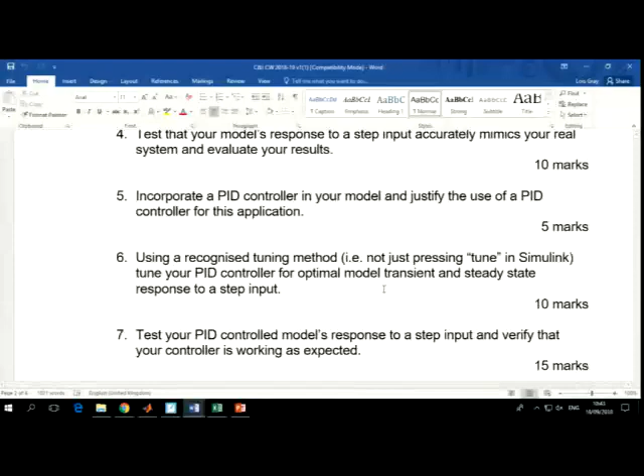Okay, and then this last two bits are to do with frequency analysis, which I haven't done yet. So the way it will work is you'll be starting the coursework before we've necessarily covered all the theory for it, but I always feel that you're always better to start early with coursework, so it gives you a bit more time to get them finished and to get your reports written up.

Okay, the hand-in date's quite late for this - it's the 22nd of October, and that's mainly because I'm going to be in China for the holidays around that time, so I didn't want you handing courseworks in just before I went off. So you've got a few extra weeks from what you'd normally have. The second one I'll talk about later.

As well as today, so you've got coursework to look at now. You've also still got questions - so you had questions last week from the book. I think this week's ones are also from the book. No, that was nothing.

Not done this maths in 2 years. No, I know it's hard.

Okay, so that's pretty much it for today in terms of me talking - it's a matter of you trying to do some work now, yeah?